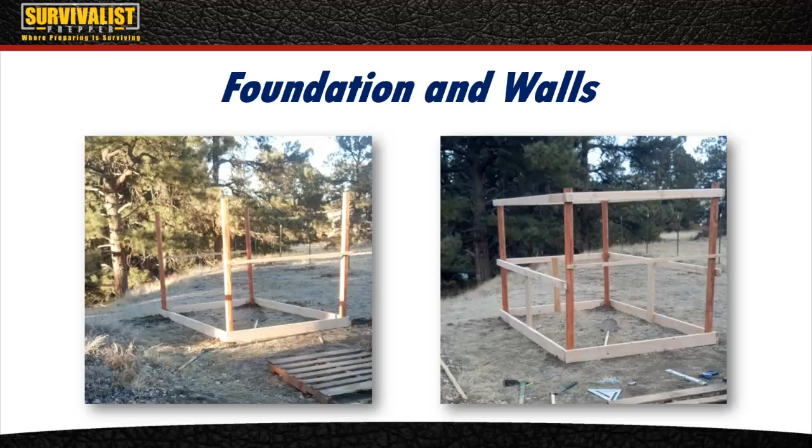And then I also took 2x4s and put them 3 feet up around the outsides, just to make sure that the building had more structure, and then added a couple 2x6s from the bottom up to that 3 foot point right there. And then once I got everything level and in place, what I did was I started working on the roof.

And now this picture right here, this is just going to show you the template I used, and then the next picture you'll see the actual template itself.

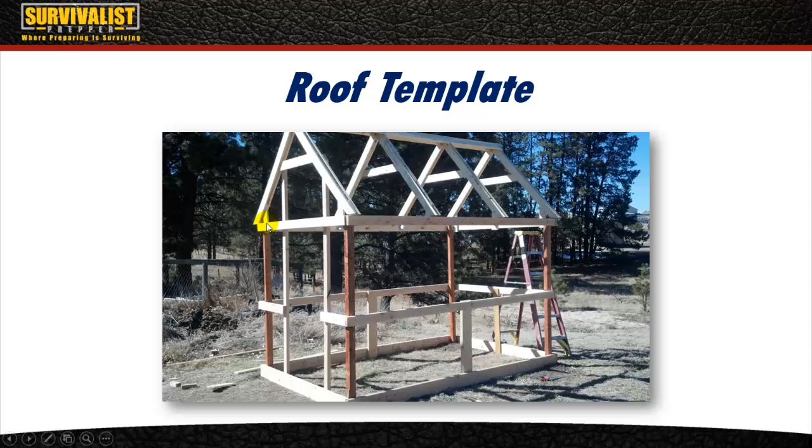But this is what I did, I took 1x4s and kind of made a sandwich where I sandwiched this piece in the middle, and then these two end pieces on each side, and these go down and fasten to the frame itself.

And I made 4 of them. Depending on your design, you might need a few more than that.

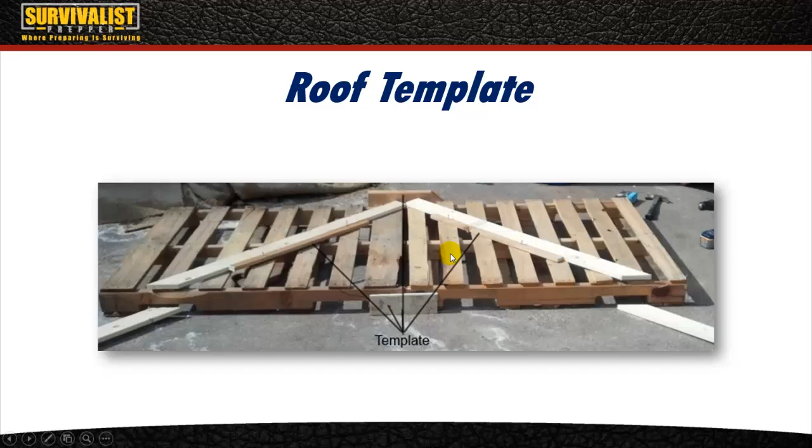But what I did was, as I fastened them on - and this is going to take 2 people - I put a couple of them on first. I had my wife help me, and then I put a 2x4 across the top just to kind of give everything a little bit of structure, make it a little sturdy so it didn't fall over on me.

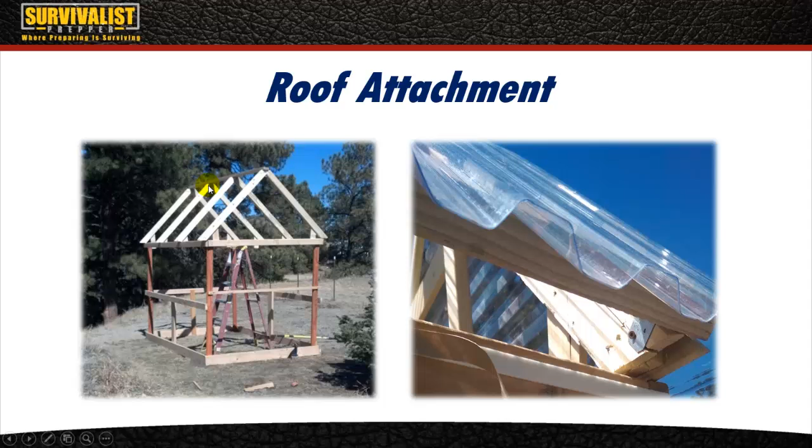And then I fastened these vertical posts, or these 1x2s like this right here. And what I did was fasten those with these kind of L brackets, and I used an assortment of these. And then I also fastened those with the same bracket to the frame itself outside here, so making that really sturdy. And then I also fastened up here in these corners with the same kind of things, that way everything's kind of tied in together.

After I got the top all built and put together, I worked on the frame of the window itself, and then the door. What I did was basically take 1x2s and figure out what size of window I wanted, then nailed that in there, and then the door itself.

What I did was take these 1x2s, I believe they are, and put those the width that I wanted from the outsides in. So I figured out what size I wanted my door, then added these, and these 2 supports back here as well. Then I built the door frame, and after that I built the door itself once I figured out the size and everything.

I used a bunch of different brackets for this. I just used a regular gate latch for the door, which I took off later on to put the film on, but I wanted to make sure everything was in place.

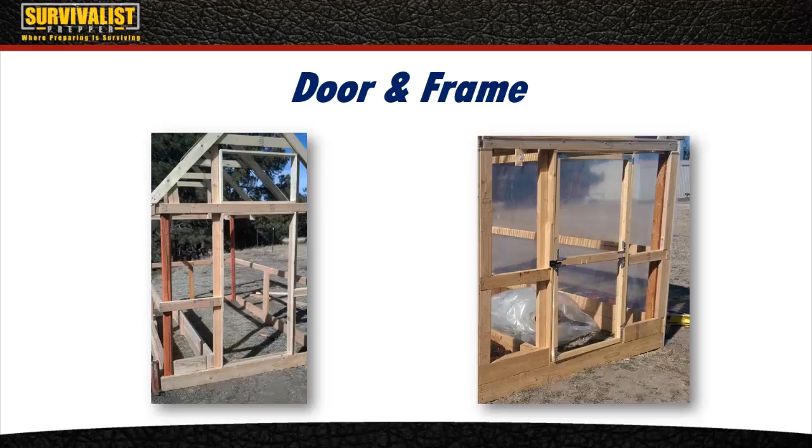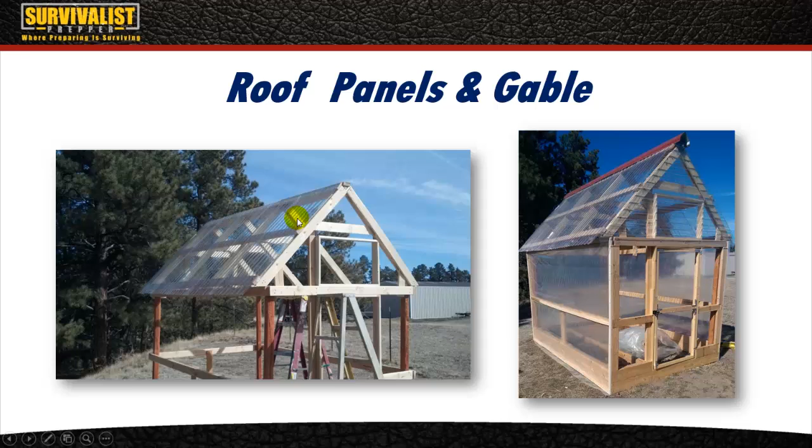After that, I decided to put the roof on. This 2x4 was already across the top, so I added another 1x4 across this side and across the back side as well to give it a little bit more structure. Then I took these roof panels that I bought, about $30 a piece, and I think I had to buy about 6 of them, and they were 10 or 12 feet long.

I can't remember, but I just cut those down to size along here. The way I fastened those was with these bolts right here, and they've got a rubber gasket that kind of fits in. I spaced those out, 2 or 3 feet, something like that. Then put the roof gable on right here, which extends a little bit out, and I'm not sure if I'm going to cut that off or leave that on.

I'm not sure yet. The extra pieces that I cut off from here, about 2-3 feet long, I cut those with a pair of tin snips or whatever you have. I actually cut these with a cordless saw, but with these, I cut these at an angle with some tin snips and just fitted them into this whole area. I went ahead and covered my window for right now because I'm not quite ready to put that in, and I wanted it covered up. So that's the roof basically.

After that, I did the raised beds, and what I did with these was just took some more 1x6s, and like I said on the article, there's a whole list of stuff that I used, depending on your design it might be a little bit different. But I just did 2 levels of 1x6s, and then fastened those together with some cut off shorter pieces of 1x2.

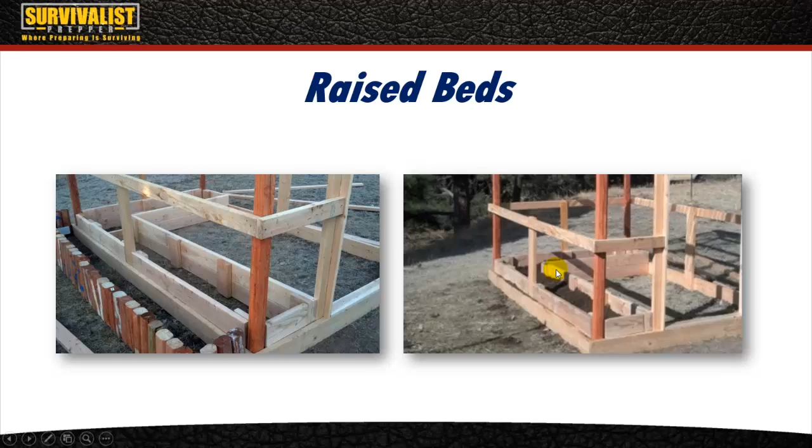After that, what I did was I needed to fasten the film. It's 6 mil film, and there's a link to where you can get that on eBay on the website as well. What I did is I bought a 50-foot roll, which was about $70 to $100, I can't remember quite exactly.

So I put this double-sided tape up. That way I wasn't drilling too many holes into the film itself. I went around the sides, the bottom, the top, and all of that, and fastened that all in there. Then after that, I took these 1x2s and covered everywhere that I had tape, and fastened them in with little screws to make sure it sandwiched that film in. That way it doesn't blow around and rip and tear.

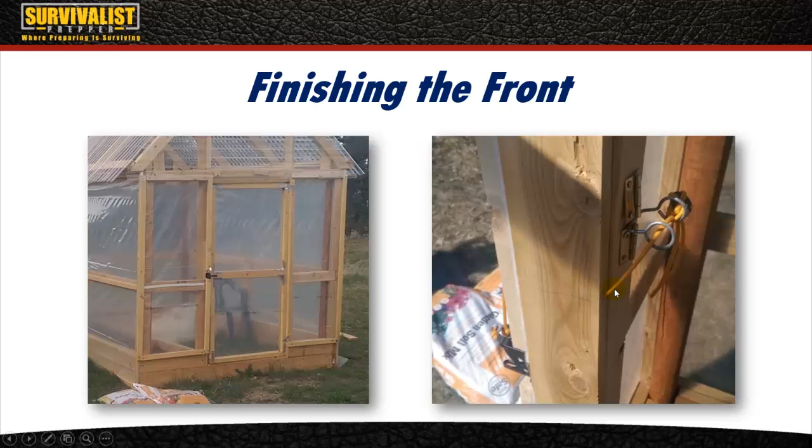So that's basically it for the greenhouse design. Like I said, there's an article that goes into this on the website, and another article that shows you how to make the roof design and gives a little bit more detail. It's really not that hard once you get the gist of it, but a really good idea.

I still need to seal everything up because in the wintertime I want to see if I can get my aquaponics unit going so the fish don't die, and keep this as warm as possible with the sunlight. So I still have a lot of sealing to do around the edges right here and underneath right here, around the door frame, all of that, to get it as sealed as possible. But for now, it's a good start.

Now I just need to start planting some stuff, and in the next video I'm sure you'll see that with everything all finished up, and I'll have some stuff growing and all of that. But for now, I guess that's it.